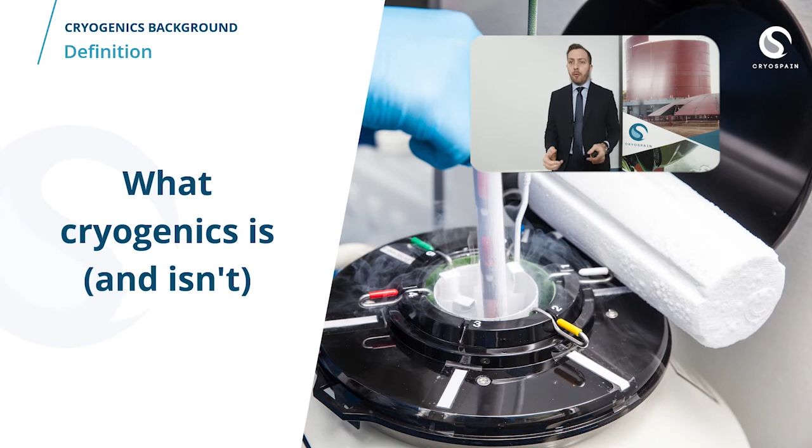Those of us involved either directly or indirectly with this industry know that there is some confusion about the definition of cryogenics. We're sorry, but if you come here to ask if Walt Disney is really preserved in ice somewhere in the world, you have come to the wrong webinar. Cryonics is the controversial science of preserving living beings at low temperatures, or so-called cryopreservation, when current medicine can no longer do anything for them. So in theory, these people, among them, according to many internet users, Walt Disney, will be preserved until there are new ways to treat them medically and revive them.

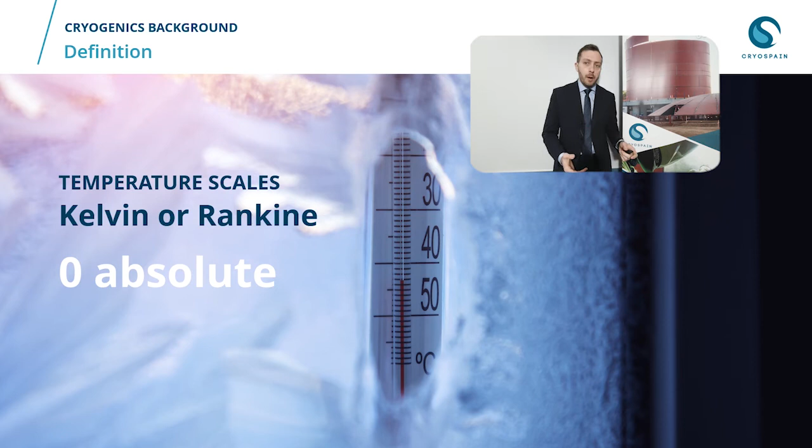Cryogenics, on the other hand, are those branches of engineering that deal with the study of very low temperatures, how to produce them, and how materials behave at these temperatures. Cryogenicists use Kelvin or Rankine temperature scales, which measure from absolute zero rather than more common scales such as Celsius, which measures from the freezing point of water at sea level, or Fahrenheit, which measures from the freezing point of a given salt solution at sea level.

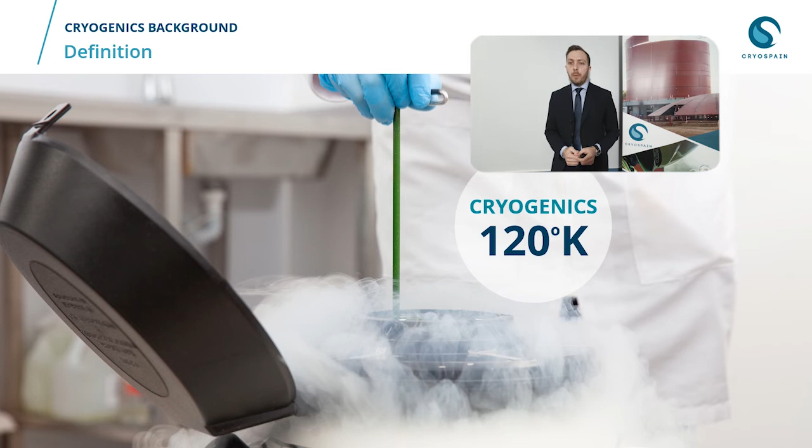But today we don't want to talk about theory, but rather the practice. Cryogenics has applications that touch every part of our lives and have very important repercussions for us and for our planet. So let's dive straight in and take a look at some of the applications of cryogenics. The applications of cryogenics touch, as I said, all areas of our lives across industries of all kinds. What applications does it have?

As a driving force for industry, the textile, automotive, metalworking industries, among many others, are already taking advantage of the benefits of this technology to improve their processes and to obtain more durable products. In the technologies that connect us, now more than ever, we rely on technology to keep us close even at a distance. The inert gases such as nitrogen, argon, and helium are used to manufacture the microchips that give life to our personal devices. But they're also popping up everywhere as even our cars and appliances become increasingly smart.

In what we eat, technical gases are used for refrigeration, freezing, for food preservation, such as with the injection of nitrogen through packaging to remove the oxygen and oxidation, and for accelerating ripening of fruit and vegetables. To reach the stars, cryogenics is the power that allows our astronauts to reach space and beyond, a really crucial part of the aerospace industry, where a mixture of liquid oxygen and hydrogen are used for rocket launches, for example.

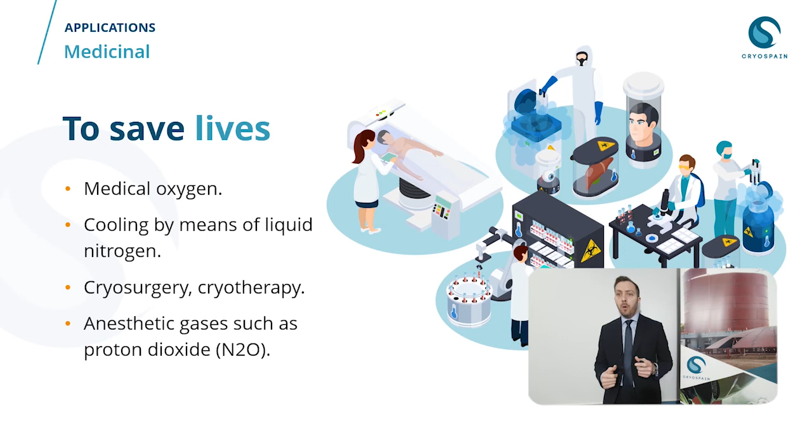For a cleaner world, cryogenics is also playing a crucial role in the switch to cleaner energy. At Cryospain, we believe that a cleaner future is possible for transportation. We're one of the main promoters of the change to cleaner fuels, and our technology is making it possible for LNG to be used more and more as a green fuel for mobility.

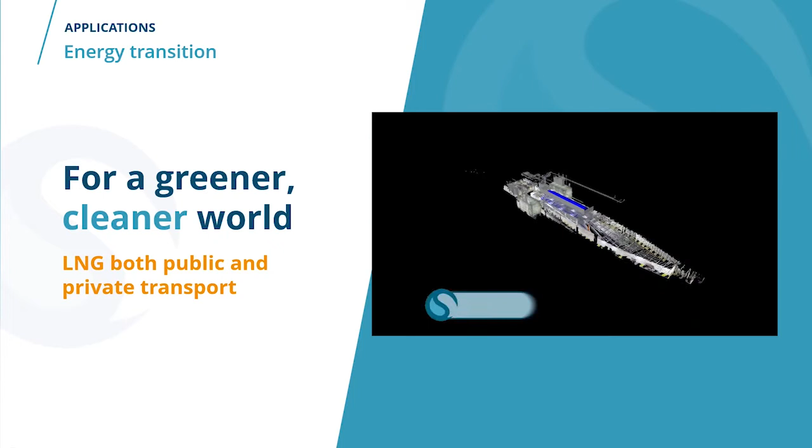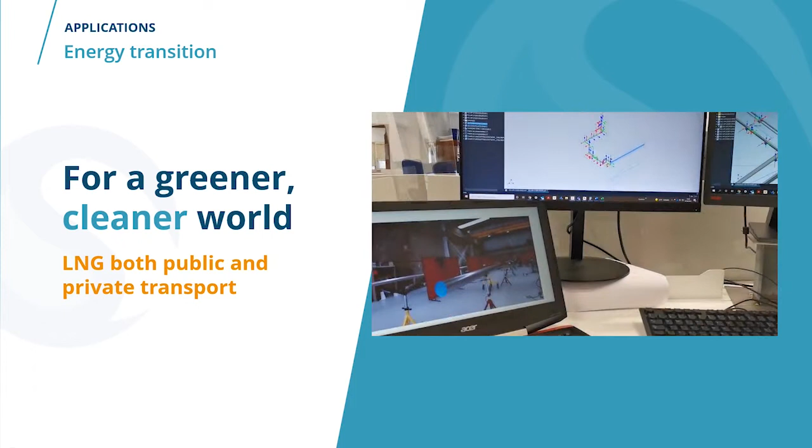We have passionate commitment to the change to cleaner fuels in shipping. On our website, you will find several successful cases of ship retrofits changing traditional fuel systems to LNG, as you can see in this video. We're also heavily involved in the use of LNG for both public and private transport, which brings me nicely to the first of our success cases.

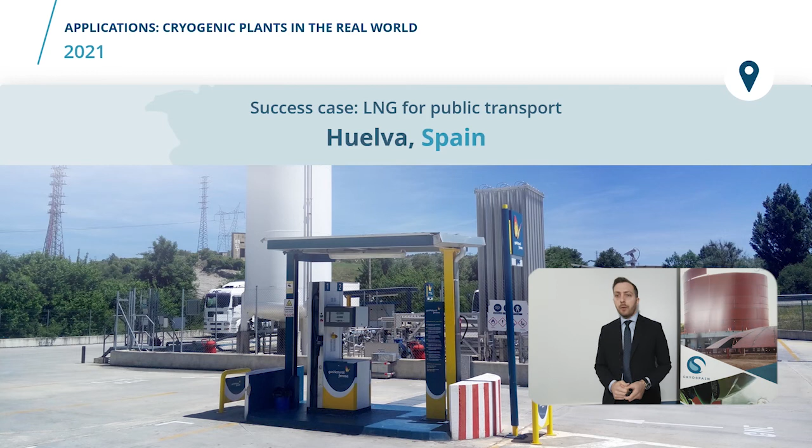We told you at the start that today we would base ourselves as much as possible on real cases. In this real job Cryospain carried out, a major natural gas operator based in Huelva, Spain, needed to build a liquefied natural gas storage and supply plant as a fueling point for natural gas vehicles.

This customer's business is expanding rapidly, thanks in part to the awareness of the growing market trend to use greener and more sustainable fuels, such as LNG, in both the public and private sectors. It was Cryospain's reputation as a driver of the shift to cleaner fuels that led the client to contact us.

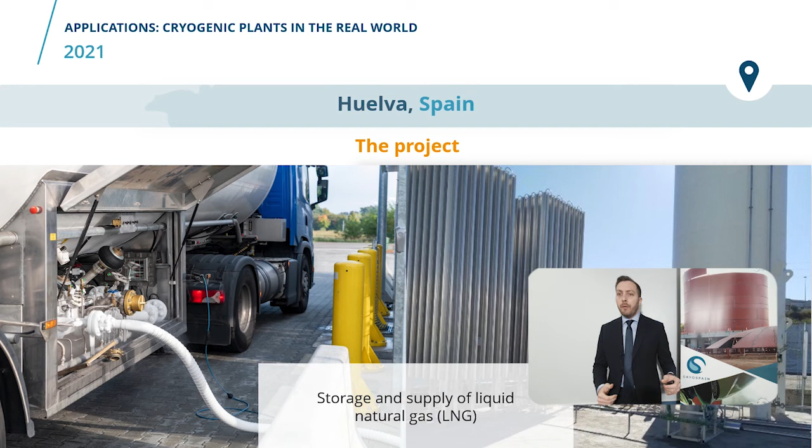The plant was to service any motor vehicle running on LNG, taking into account the differences between the requirements of large and smaller vehicles. Cryospain would have to ensure total safety and ease of use regardless of who used the plant for refueling. Cryospain was in charge of designing and manufacturing the plant, as well as supplying and assembling all components: storage tank, pumps, electrical installation, etc.

We'll be diving deeper a little further on in the webinar into the importance of production capacity for the cryogenic service of today and tomorrow. Cryospain has 2 fully operational cryogenic workshops, which allows us to supply tailor-made components within the tight timescales that such a project requires, and to do so while controlling our own quality and safety standards.

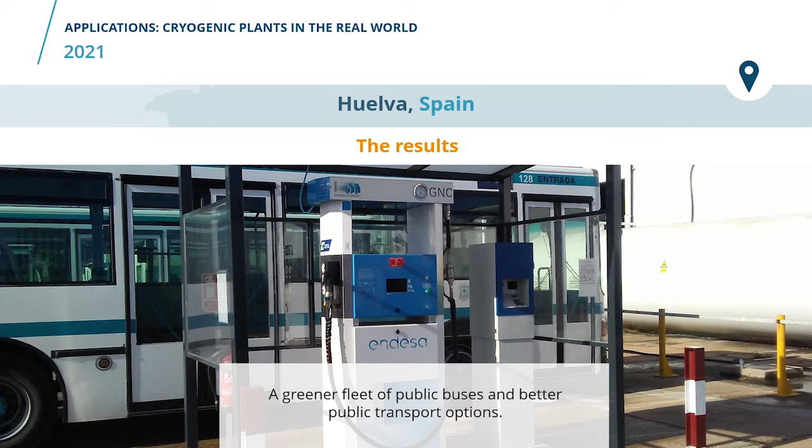The result of the Huelva project was a fully operational plant for private and public natural gas vehicles. A cleaner public bus fleet and improved public transportation options have been a double win for the area's air quality.

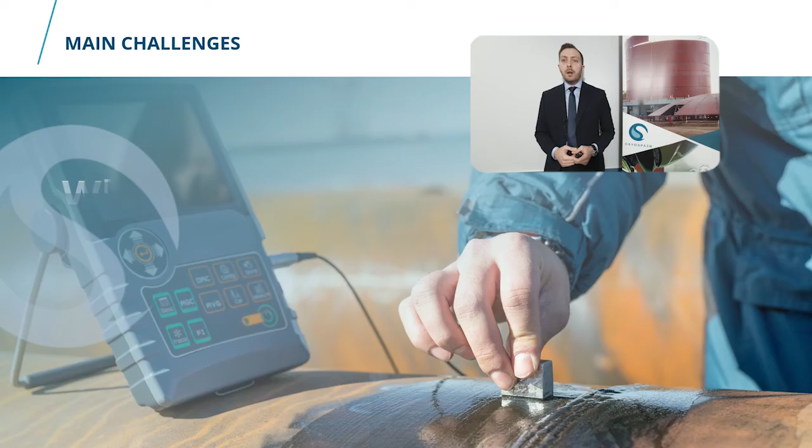So in the next section, we turn to the main challenges of our industry. We have taken a look at the applications cryogenics has in all areas of our lives, but cryogenics is a complex technology with many challenges. To talk about some of the factors that need to be managed in order to harness the benefits of cryogenics, I'm now delighted to hand over to my colleague Jaime Gutierrez Fuentes, Technical Director at Cryospain, so that with his extensive experience, he can share with us the challenges that we may come up against when working in cryogenic plants.

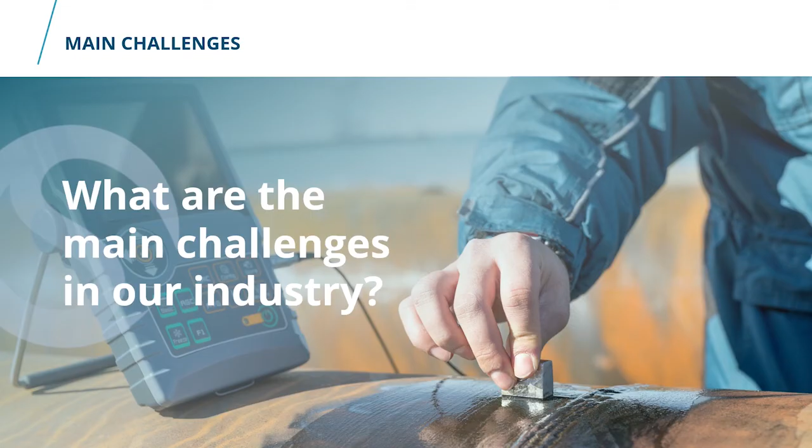Thank you very much, Christian. That's right. In my role as Technical Director, I have seen firsthand the many challenges this technology brings and how our experts manage them every day and with every project. I have been dedicated to cryogenics the last 9 years of my professional career, starting as a project engineer and taking more and more responsibility as a design leader, site manager in different places of the world, from Asia to the USA, project manager, and now technical director for these last 2 years.

When it comes to cryogenic systems, the materials themselves are already a challenge, as they have to be just right for the complex functions they will perform. This is even more limiting for us, given our 100% commitment to customize each job to each customer's specifications. Therefore, Cryospain workshops are full of carefully selected materials. This is why at Cryospain we have an extensive list of material data sheets updated in detail according to the latest developments and the experience we are gaining every day, audited suppliers who are leaders in their sectors, and a quality department focused on eliminating any potential material defects.

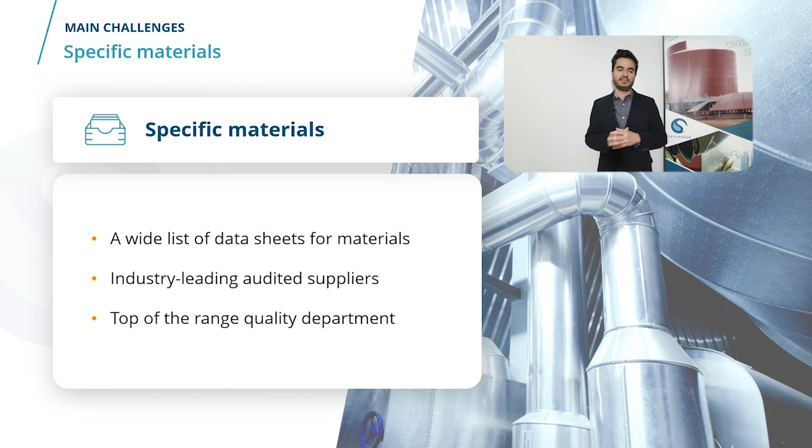Another challenge in our industry is boil-off or vaporization, leading to losses of liquid product. We combat this with vacuum insulation. Cryospain is an expert in this technology. Known in English as cryolines, they minimize the evaporation of liquids during the transfer within a cryogenic installation from one piece of equipment to another, such as in the filling of one tank from another. The multilayer insulation and vacuum between the outer and inner tubes is what guarantees the very high performance of this kind of thermal insulation.

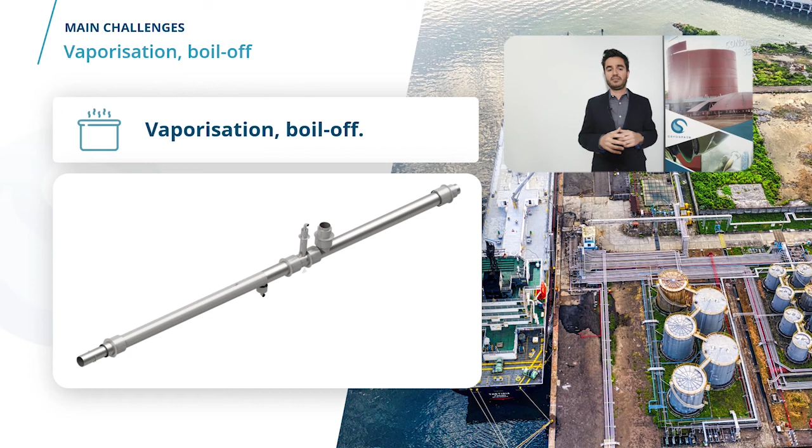But boil-off isn't only a risk in cryogenic fluid transfer, nor are cryolines the only product Cryospain offers to the cryogenic market. Cryogenic products storage is another specialty of our company. We design, manufacture, and maintain flat-bottom tanks with double steel walls and perlite insulation. They are used for large storage capacities between 1,000 and 30,000 cubic meters. Due to their size, these tanks are prefabricated in Cryospain workshops with final assembly and welding taking place at their final locations.

Vacuum insulated horizontal tanks for capacities between 750 and 1,000 cubic meters. We are currently involved in a very interesting national project where we are supplying 4 units of 1,000 cubic meters each for the new bunkering plant in Los Barrios, Cádiz.

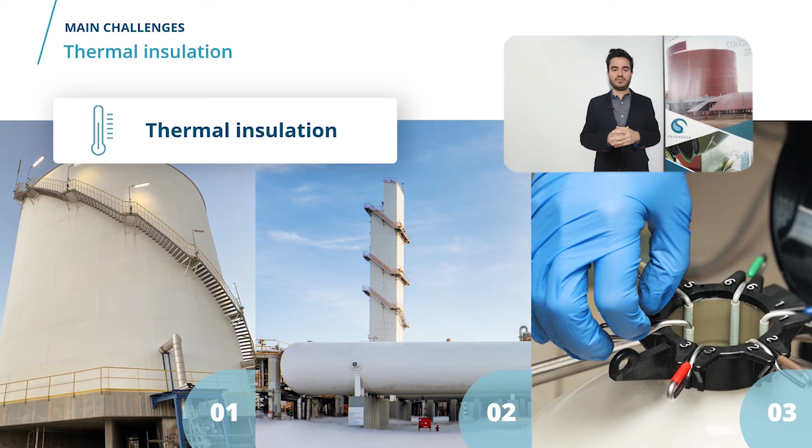Dewars and rangers, the smallest of all, with technology similar to vacuum insulated pipes.

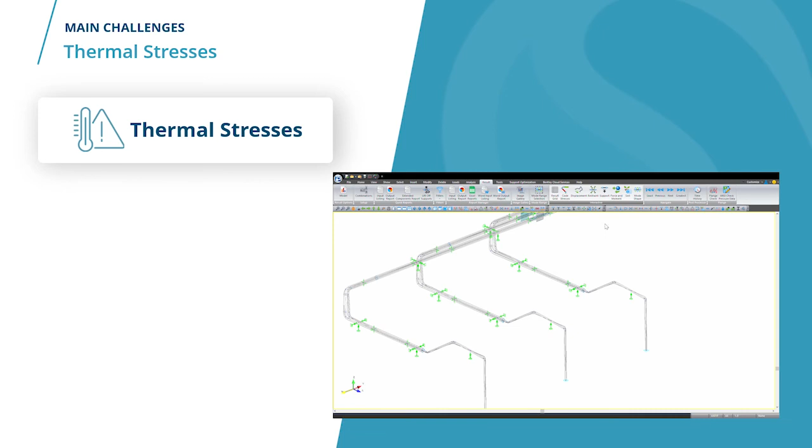Another major challenge is thermal stress. Our equipment suffers from the thermal shocks between the ambient condition of a workshop and the very low temperatures of its final function. This affects their properties and size, creating stresses that have to be carefully studied. It is a best practice at Cryospain to know how the customers will be applying our products in order to calculate the thermal cycles they will face and to study the thermal fatigue failures, for example.

In this 3D video, you can see how we are able to use state-of-the-art computer-aided design software to overcome this challenge and guarantee the integrity of our equipment.

And to close with another important challenge, although the list is difficult to keep short, we can't forget the conditions we have to deal with in terms of climate and local conditions. Cryospain is already a truly global company and our facilities are located all over the world. In many places, we may face unfavorable conditions where, due to proximity to the sea, large bodies of water, and high humidity levels, we have to take measures to avoid corrosion.

We have to deal with everything from heavy rains in the Netherlands to mud in Texas or truly remote places such as Santa Cruz in Bolivia. And sun and radiation in Abu Dhabi. In places like Jamaica and the Canary Islands, the equipment has to be tropicalized to protect it from humidity, and we have even had to come up with our own unique designs in tanks to combat the humidity. Seismic hazards in areas such as Taiwan, where we have a total of more than 7 million liters of cryogenic fluid installed in different parts of the country.

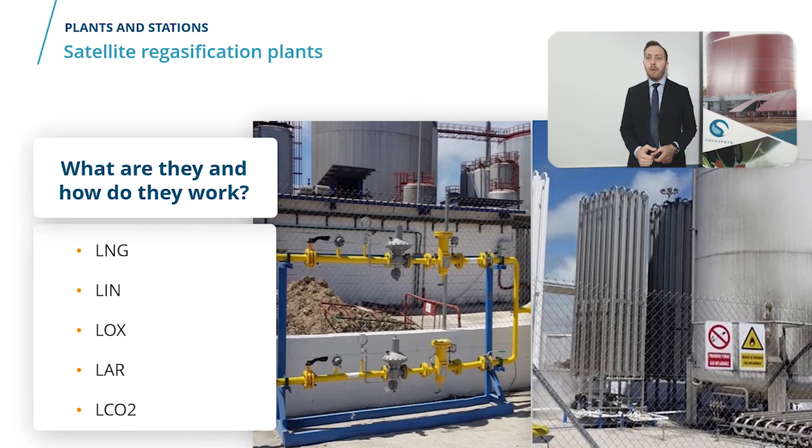These are isolated plants to which the service liquids such as LNG, LIN, LOX, LAR, and LCO2 are supplied by tankers or trucks on a periodic basis for subsequent regasification and supply for various uses and applications that we will see later on.

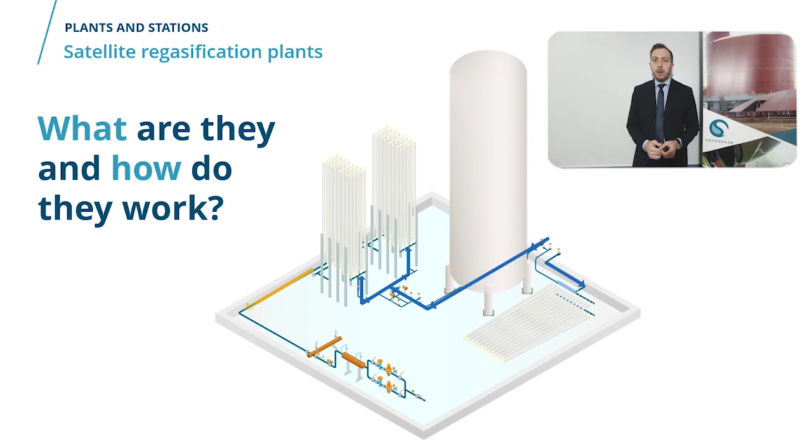So how do they work? Regasification plants operate as follows. The service liquid is stored in the tank under pressure to minimize the vaporization rate of the liquid. This liquid's flow will be dictated from the control system as is required for the process, passing through the environmental vaporizers located on the left of the tank, which will help raise the temperature of the liquid to such a degree that the service liquid returns to its natural gaseous form. Subsequently, the gas will pass through an electrical heating system which allows the desired temperature of the service gas to be reached for the process in which it is required.

At Cryospain, we have extensive experience supplying satellite regasification plants either for LNG or industrial gases for various uses, processes, and industries as shown as follows, in a range of flow rates from 200 normal cubic meters per hour to 15,000 normal cubic meters per hour. Our experts have created LNG plants of this type for all types of applications, including bunkering, providing a flexible infrastructure to supply ships or port facilities; vehicular, for fleets of public vehicles or stations, light or heavy, operating on LNG or CNG; and for industries which, due to their distance from supply networks, cannot have access to natural gas. This includes ceramics, foods, chemical, textile, agriculture, etc.

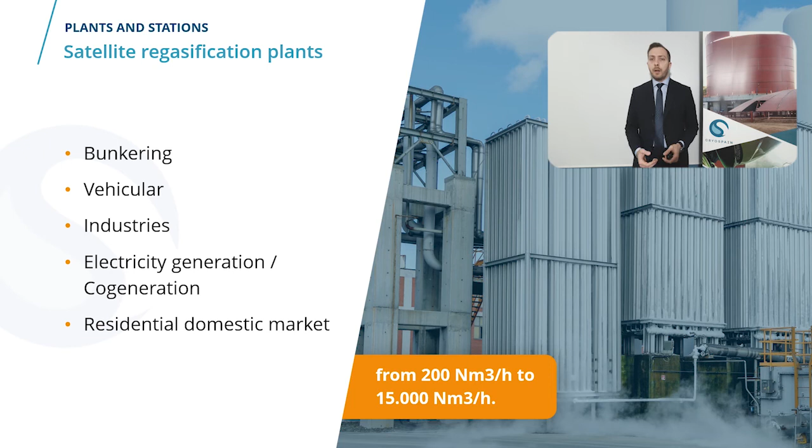Electricity generation or cogeneration, either working on an island to export and implementing thermal utilization solutions. Domestic residential market, allowing the gasification of urban areas far from gas networks. We have already talked about our success cases in the supply of LNG and CNG refueling stations.

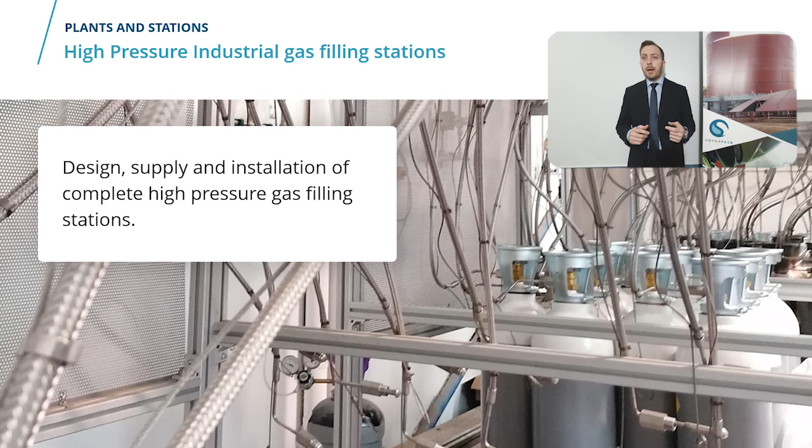We also have extensive experience in the design, supply, and installation of complete high-pressure gas filling stations for various industrial gases, including nitrogen, oxygen, argon, as well as gas mixing systems. This includes the supply of the cryogenic storage tank, the pump, the vaporizer, the filling rack, among a range of other equipment.

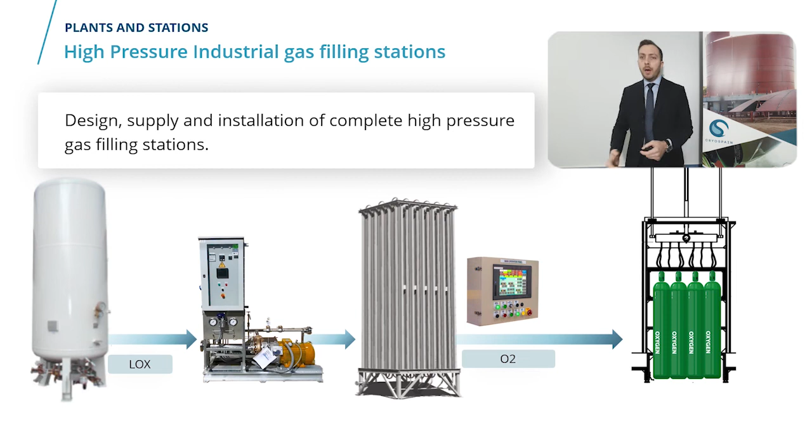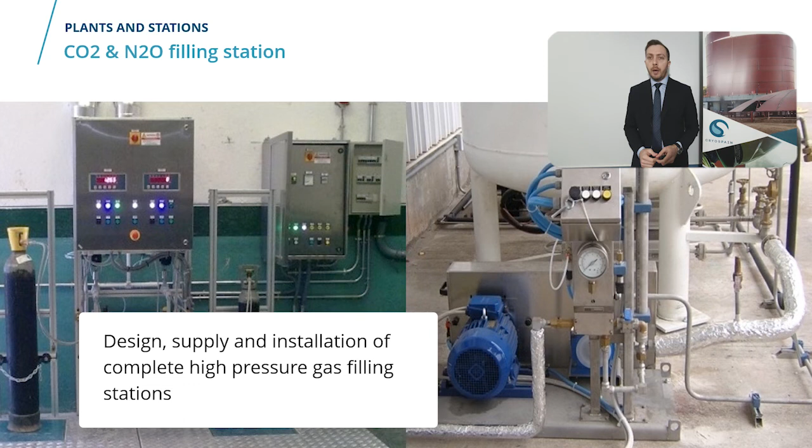A good example of Cryospain's ability to make 100% customized equipment are turnkey filling stations for CO2 and N2O gases. They require specific filling and metering procedures, and our design team adapts the operation of the plant from fully manual to fully automatic according to customer indications. In the case of high-pressure medical gas stations, the installation includes the tank, the pump, the vaporizer, and the filling rack.

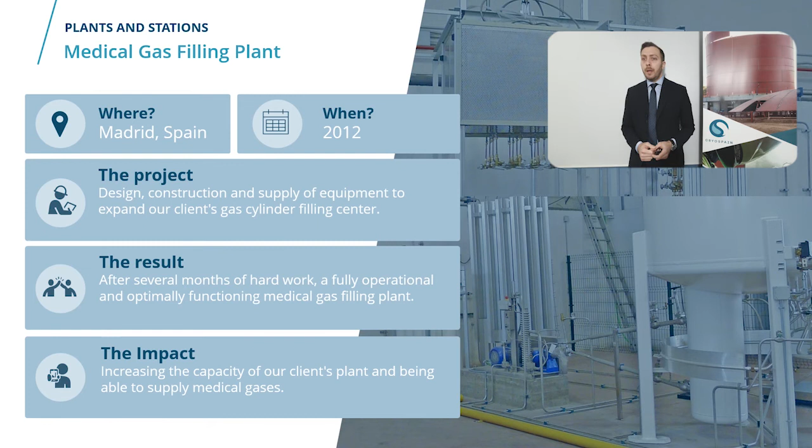The project consisted of design, construction, and supply of equipment to expand our client's gas cylinder filling center. The result, after several months of hard work, a fully operational and optimally functioning medical gas filling plant. The impact: we increased the capacity of our client's plant and were able to supply medical gases. It is a special point of pride to talk about this particular success case.

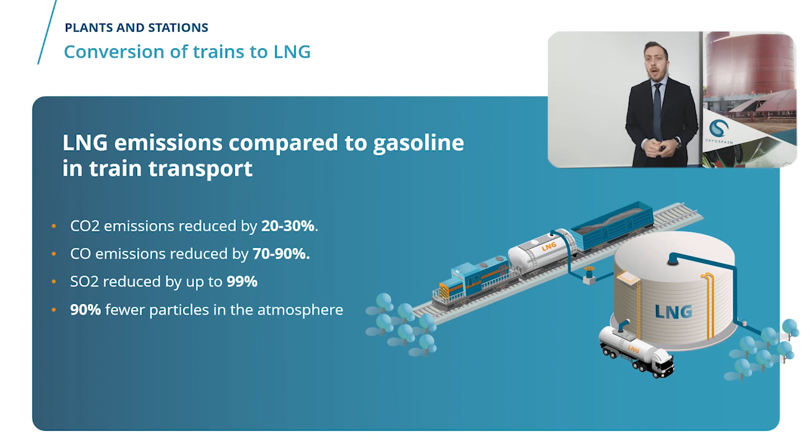Cryospain participates as a technological partner in the Rail LNG project that has launched the first LNG-operated freight railroad in Spain to promote a change that has absolutely vital advantages for the environment you can see here. The CO2 emissions are reduced by 20 to 30%, the CO emissions are reduced by 70 to 90%, the SO2 has been reduced up to 99%, and 90% fewer particles in the atmosphere.

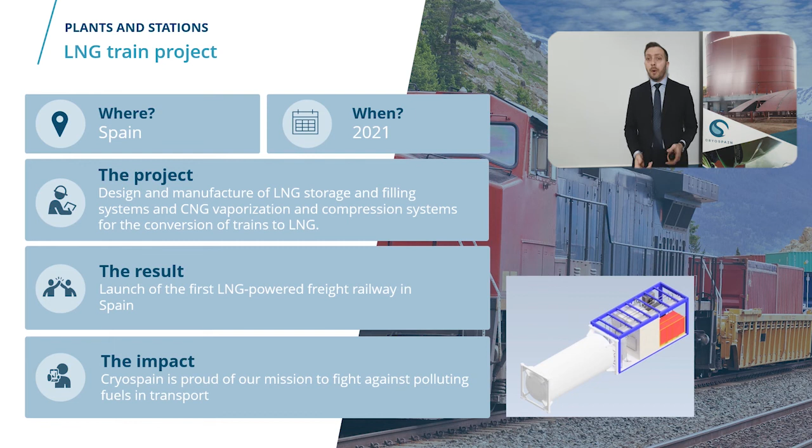Our collaboration in this project took the form of all the engineering, design, and manufacturing of the LNG storage and filling system and CNG vaporization and compression system for the conversion of the train to LNG. Where has this project been developed? In Spain in 2021. It consisted of the design and manufacture of the LNG storage and filling system and CNG vaporization and compression system for the conversion of the train to LNG. The result was to launch the first LNG-powered freight railway in Spain. The impact: Cryospain is proud of our mission to fight against polluting fuels in transport.

As we have already seen today, we're talking about the present with a view to the future, and for us, a factor that will be increasingly key is the capacity of cryogenic product and service providers to offer simple, comprehensive solutions that are always tailored to the customer needs. To address this issue, I will pass the floor to Pierre Merget, Sales and Marketing Director of Cryospain, to talk us through two cases that summarize the concept of customized solution well and are examples of how customizing to the unique needs of each customer has become fundamental.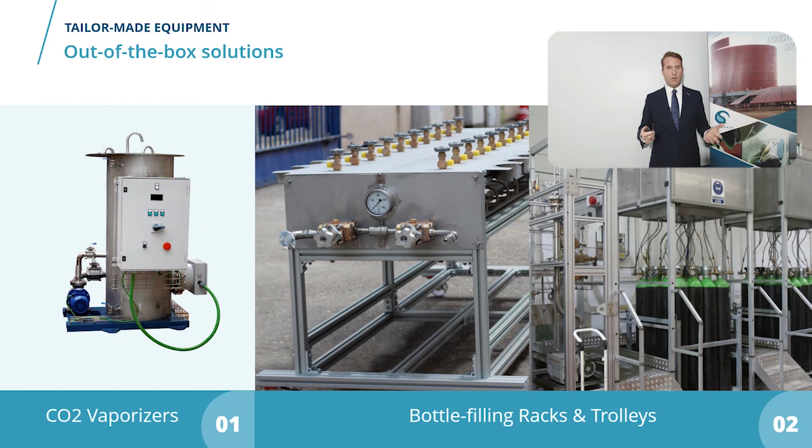Thank you, Christian. Yes, indeed, the customization of cryogenic solutions is key for today's projects. Those who make their living from cryogenics cannot afford production downtime and need out-of-the-box solutions and equipment. In Spain, we have extensive production capacity in our very own workshop, which allows us to make tailor-made equipment with the very latest technology, exactly in line with what each customer has communicated to us.

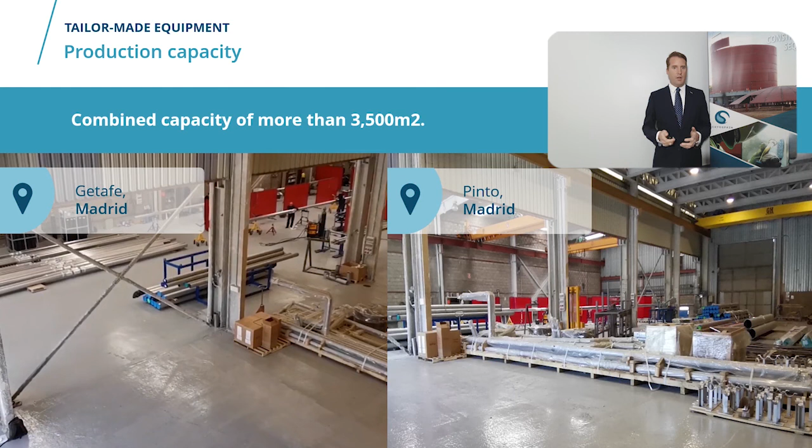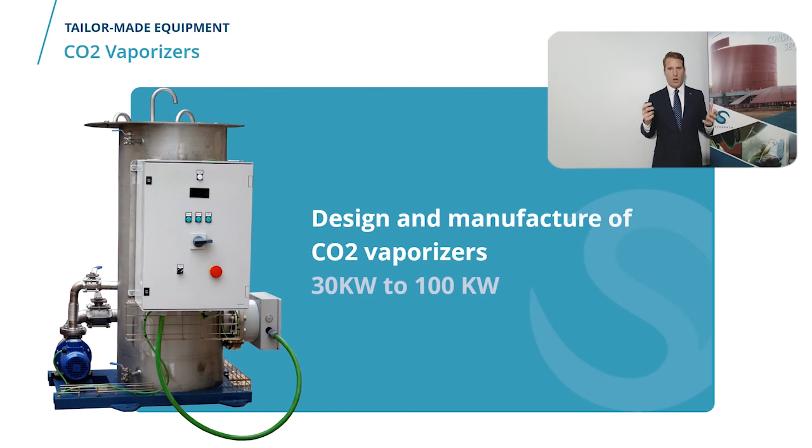We have a workshop in Pinto, another one in Getafe, both in our hometown in Madrid. Between them, we have a combined capacity of more than 3,500 square meters. Here are some examples of the equipment we customize. We design and manufacture CO2 vaporizers according to customer design standards and PED, with a power range from 30 to 100 kilowatts for a variety of applications and uses.

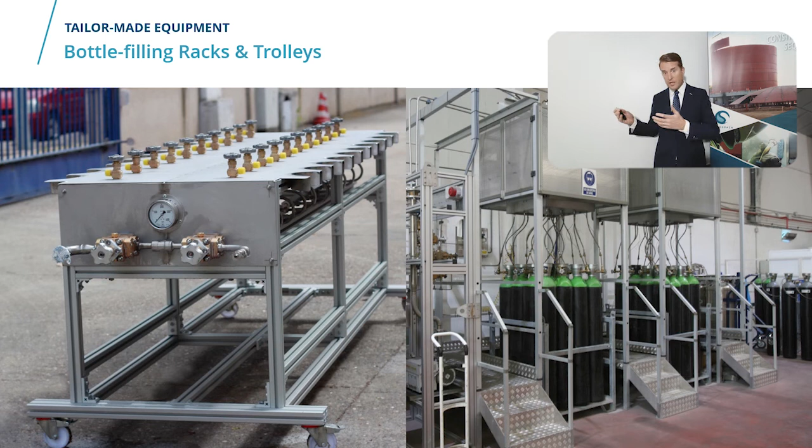Cryospain also designs and manufactures bottle filling racks and trolleys, scalable according to the customer's need in terms of number of bottles, filling pressure, and available space. As Christian mentioned, while speaking about the CO2 and N2O filling stations we offer, our design team will adapt the operation of the plant from manual to fully automatic according to the customer's indication.

Our experts also design and manufacture cryogenic cold boxes or packaged units, which boast a range of accessories such as pumps, flexible hoses, filters, manual or automatic valves, even vaporizers, and control panels, to name just a few. Let me talk about a real job we did which perfectly highlights our capacity to customize this piece of equipment.

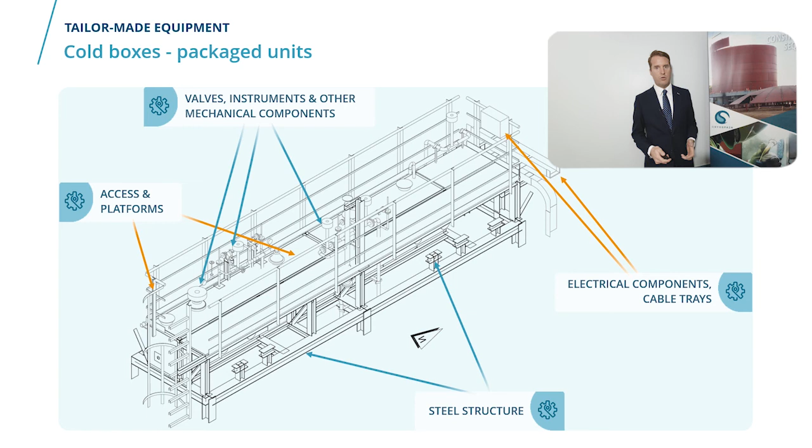Today's cryogenic customer wants a one-stop shop. This customer in Italy chose us because they needed a company that not only had multidisciplinary expertise, but also its own production capacity. So let's speak about our success case.

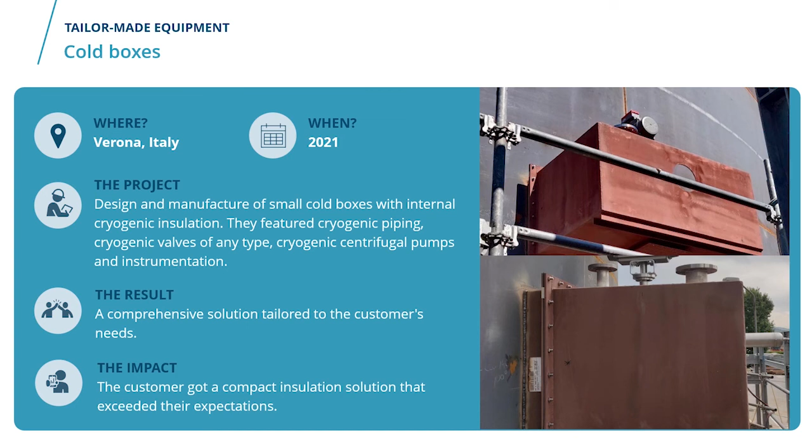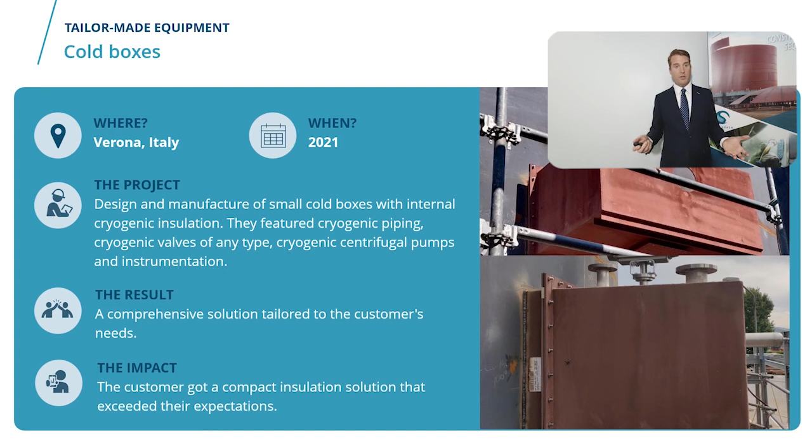This happened in Verona, North Italy, in 2021, last year. Cryospain designed and manufactured a small cold box with internal cryogenic insulation. We featured cryogenic piping, cryogenic valves, and instrumentation. This was a comprehensive solution tailored to the customer's need, and the impact on the market is that the customer got a compact solution that exceeded their expectations.

Cryospain also designs and manufactures ad hoc cryogenic centrifugal and reciprocating pump skids, whose accessories can include anything from flexible hoses and filters to manual and automatic valves, vaporizers, control panels, etc. This kind of skid will be used for any application like liquid nitrogen, liquid oxygen, liquid argon, LNG, and any other liquefied gas overall.

For us, this success case in Germany represents the future of added value for customers: 100% turnkey, or plug and play if you prefer, complete with an HMI interface, tested in our own workshop to be ready for operation from the moment of arrival with minimum disruption.

So let's speak more in detail. Where did it happen? This project was delivered for Germany. When? In 2020, two years ago. The project consisted in the integration of a cryogenic pump with its own control system and additional accessories into a unit we call a skid. The result: the skid was designed, manufactured and tested in-house, an integrated comprehensive solution 100% adapted to the customer's need. Impact on the market: maximum efficiency with minimum disruption. The customer benefits from a fully plug-and-play solution.

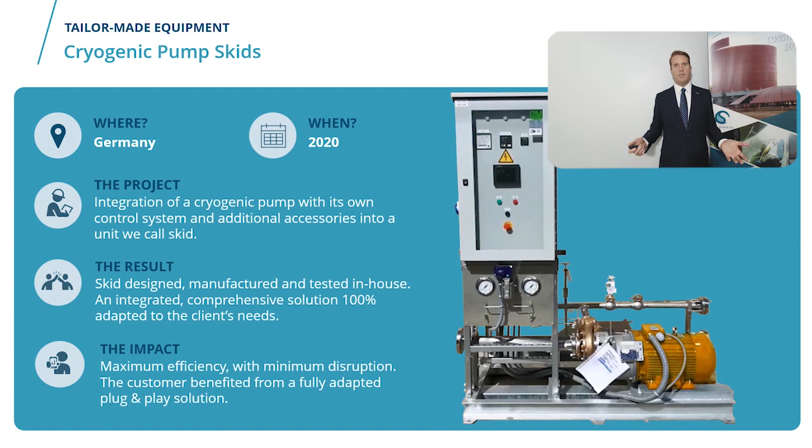Thank you very much, Pierre. Very interesting. Before we talk about key capabilities that are necessary to get the very best for cryogenic projects of all kinds, we want to take a look forward for a moment and talk about some very interesting applications for cryogenics in an increasingly present future.

You may have heard about quantum computers being talked about as the future of computing. These incredible machines can only operate at ultra-low cryogenic temperatures, close to absolute zero, with qubits, which take advantage of a phenomenon called superposition. Unlike traditional data bits, qubits can simultaneously hold both 1 and 0 values. Qubits are extremely sensitive to small amounts of thermal noise, so to maintain a stable state long enough to complete the computation, coherence, they're kept at temperatures near absolute zero.

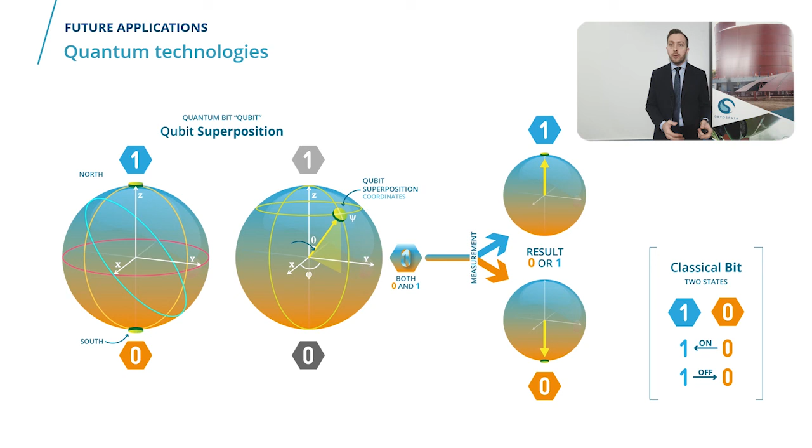To increase efficiency, designers often take advantage of superconducting connections to incorporate qubits into computer systems. It is predicted that a conventional supercomputer consuming 1 megawatt could be replaced by a superconducting machine consuming 10,000 watts. Future computing will thrive, but only in deep cryogenic temperatures.

One application that gives us reason to hope for a more sustainable energy future is energy storage plants. This technology, powered 100% by renewable energy, eliminates the problem of geographical limitations by storing energy in the form of supercooled liquefied air or hydrogen and then expanding it into turbines when the energy is needed. With the rise of this type of technology, Cryospain will be present to offer the necessary equipment to run this type of plant, putting our capacity to supply cryogenic pressure tanks, pipe-in-pipe, skids, and pump skids at the service of this revolution.

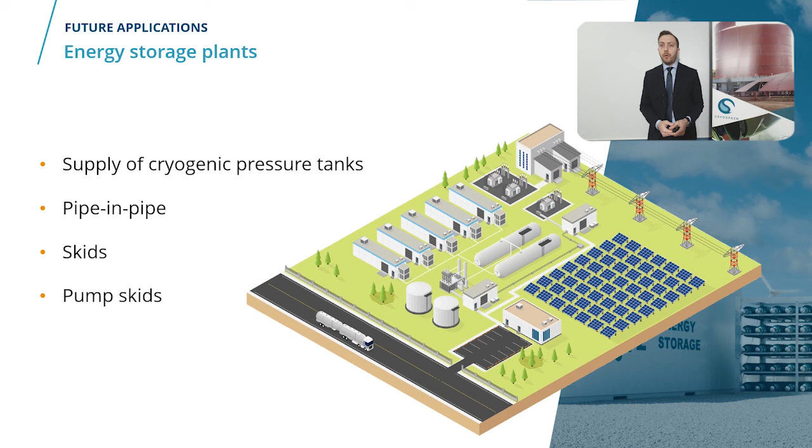Hydrogen is a clean fuel, and there are numerous companies working on producing hydrogen through electrolysis and other processes, then using the hydrogen as a fuel source for various applications, including providing fuel for vehicles. In fact, there are several companies involved in the development and supply of hydrogen refueling stations.

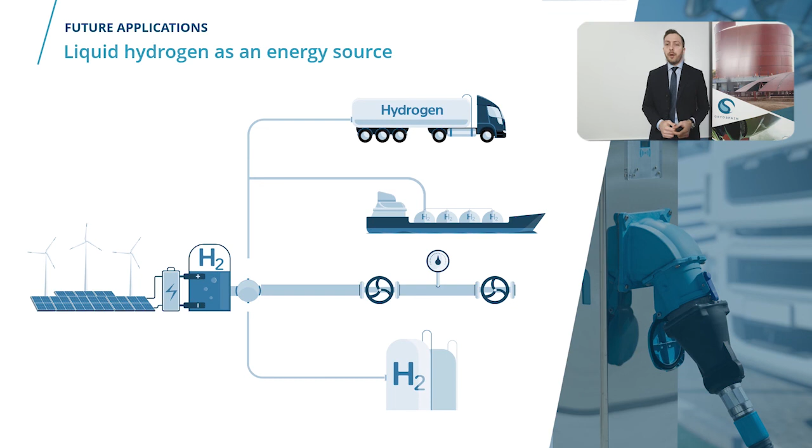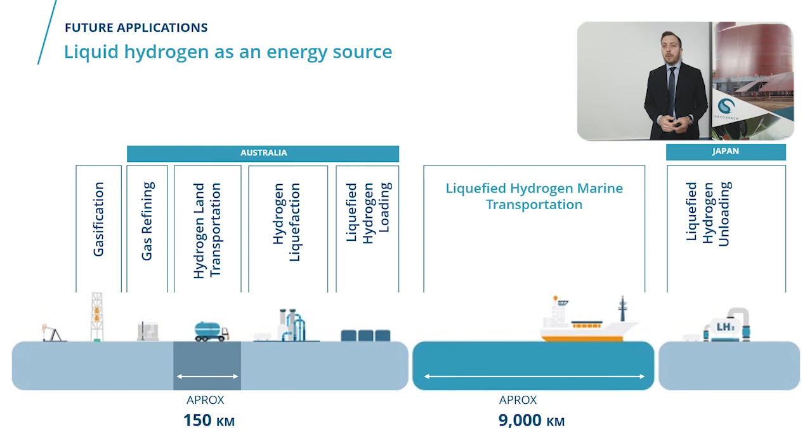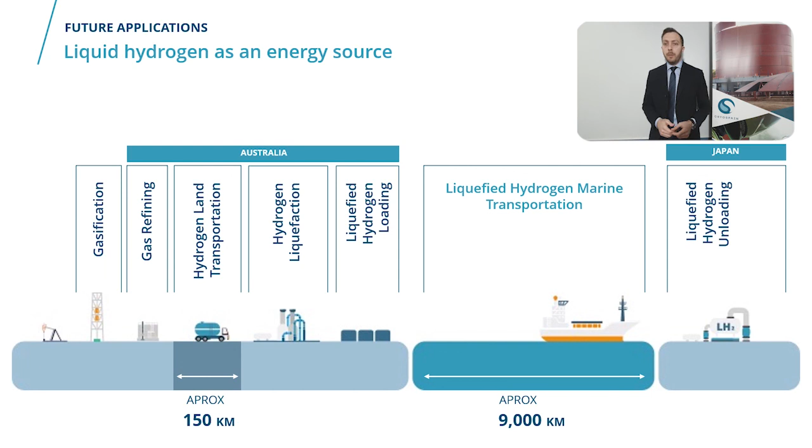In this case, we can see the value chain of one of the world's most important liquid hydrogen projects today. The brown coal is gasified, then the gas is refined, extracting the hydrogen gas. It is then transported by truck over land to the liquefaction plant. At the liquefaction plant, the hydrogen is cooled to minus 253 Celsius, reducing its volume 800 times and turning into liquid for more efficient transportation. The liquid hydrogen is loaded onto ships for transport to other locations where it is stored and distributed for its various uses, the main one being as a fuel.

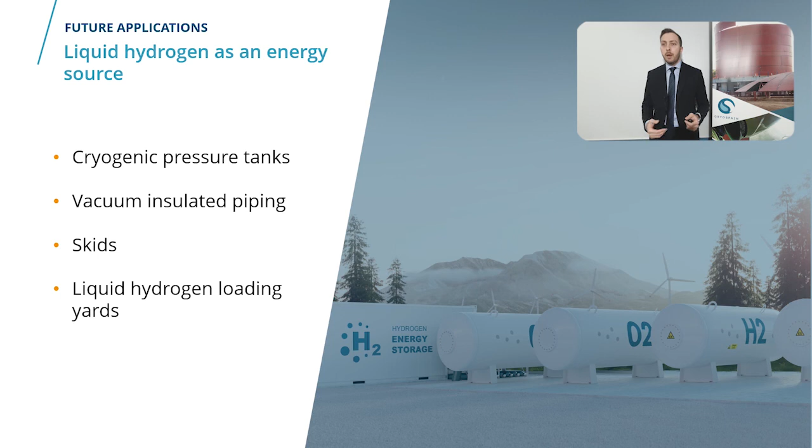Likewise, these miracles would be impossible without the kind of equipment that Cryospain provides, manufactures and installs every day: cryogenic pressure tanks, vacuum insulated piping, skids, liquid hydrogen loading yards, amongst others. So we certainly do not rule out that Cryospain will be directly involved in the supply of hydrogen refueling stations in the not too distant future.

And this brings us to the last section of our webinar, because to make yesterday's project a reality today and tomorrow, it's not just about the state-of-the-art plans of equipment.

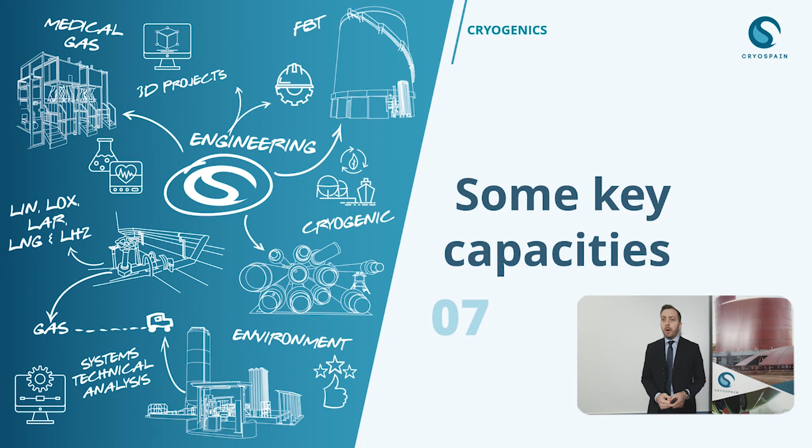Also key are the capabilities of those of us who work in the industry to take projects from idea to reality. Here we wanted to talk about two capabilities that we value and see as key to the present and future of the cryogenic industry.

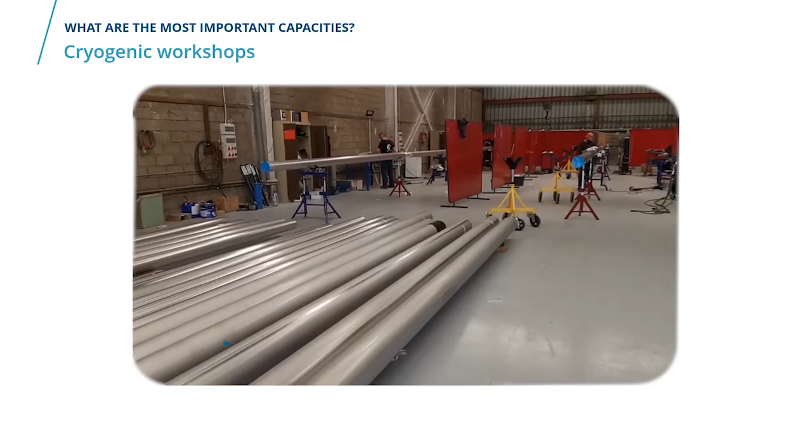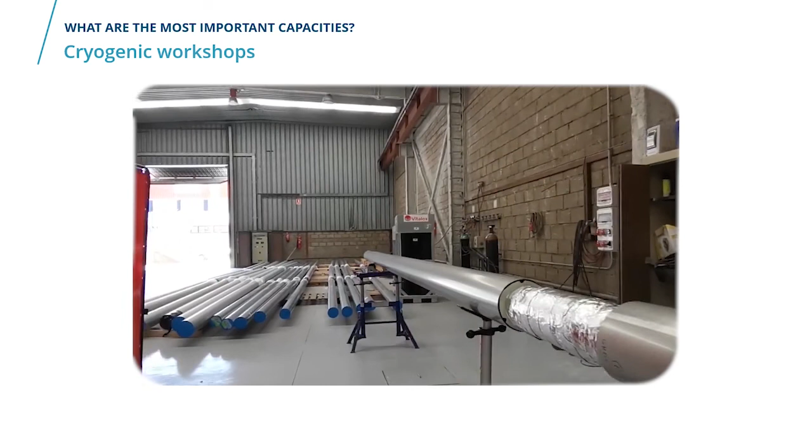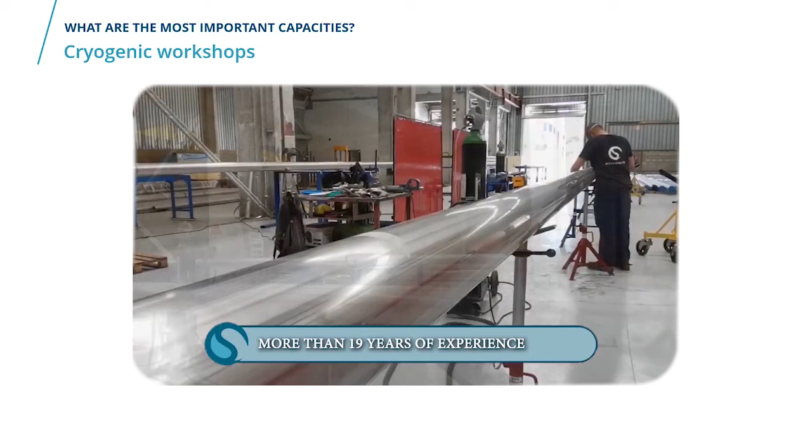Let's start with our workshops. As Pierre already mentioned, the future of cryogenics lies in customization and the capacity to offer our customers turnkey projects. Having our own workshop with more capacity allows us not only to customize projects to each customer, it also allows us to offer solutions which can be started upon arrival and be fully operational without unnecessary interruptions to the production flow. We save our customers money and impact on their business going forward.

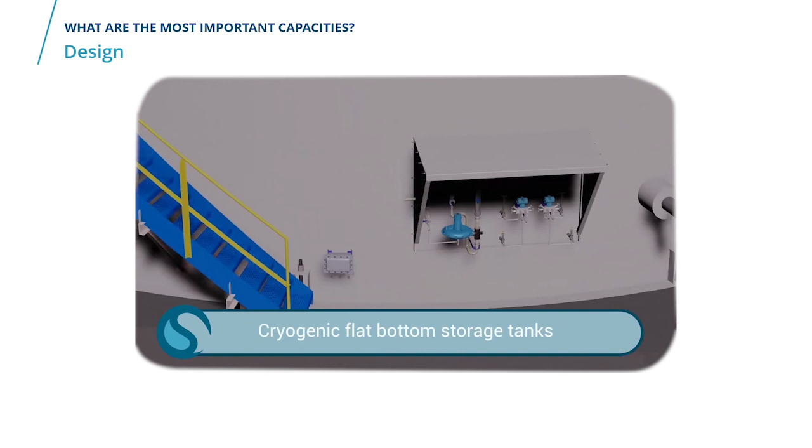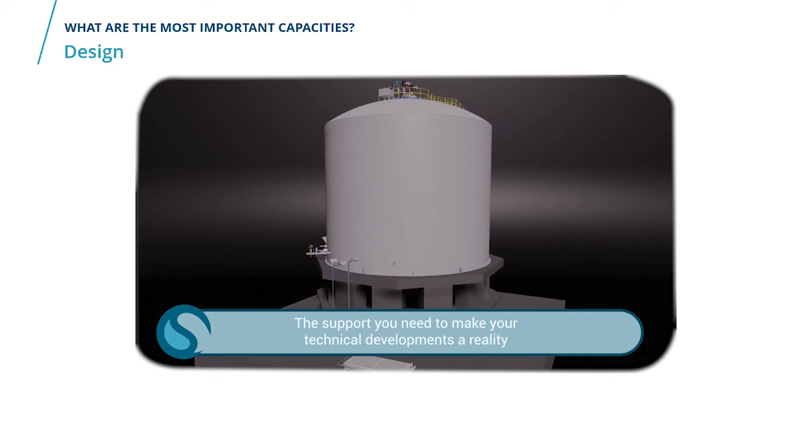Having more and more of the latest technologies for previewing the latest cryogenic systems is crucial. We've seen how we're able to generate 3D renderings for stress testing, but also involve the customer in the decision-making and feedback loop that will lead up to a better product. The future of our industry is a more proactive and engaged customer in the pre-launch process, a customer who understands their options and is more deeply involved in the realization of their cryogenic projects.

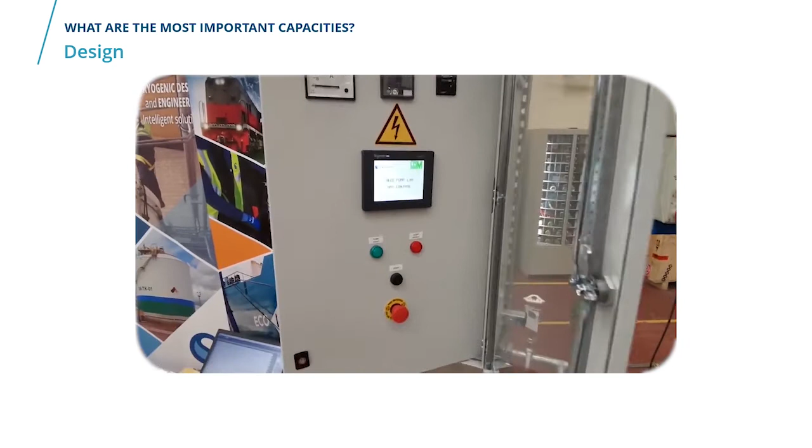In the end, the future of cryogenics comes down to how we in the industry can bring this powerful and multi-purpose yet complex technology down to the reality of the needs of people and their projects. We're passionate about cryogenics' ability to change the way we work and live, and hope we have inspired you, provoked your curiosity, and generally given some reasons to believe that, as we do, cryogenics will shape and improve our future. Thank you.